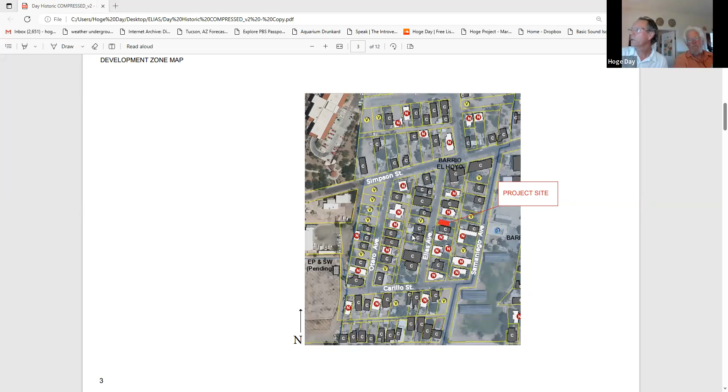Here's the historic inventory form. It's a contributing property, built in 1928. It's unfired adobe, stuccoed, with a couple of courses of fired adobe block on top of the parapet to cap it off. This structure is a bathroom that was added in the 1950s, actually frame and stucco. The house has wood sash windows, actually double hung. This photo makes it look like there's mountains, but there's not, that's just a security screen. Wood doors, stucco finish. I think it's got a flat roof, obviously, and it drains to the east.

Just to make a note of this big mesquite tree, because I'm going to talk about that in a second, behind the house.

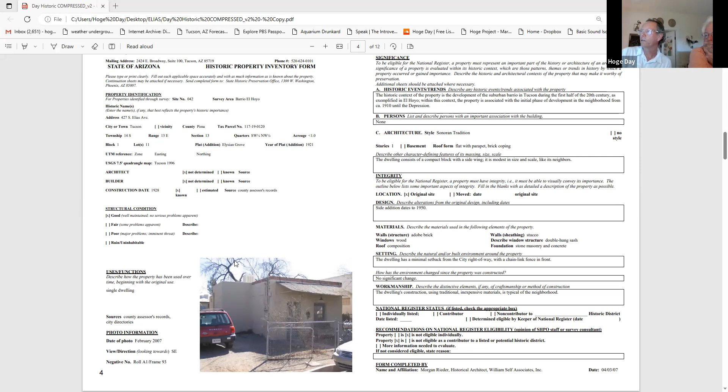So Pat's concept was to add one large feeling room to this otherwise really small house. I'll show you the floor plan in a minute. It's basically broken up into 3 rooms, kind of shotgun style, each of them really small. So his idea is to really move here, and he's thinking about sort of aging in place in this house and moving into something more manageable.

So to make it really livable, he'd love to have one room that's large, with more light and higher ceilings. But his concept for getting it onto this really small lot is to put it here on the north, and preserve this area to the southeast under that mesquite tree as a really nice southern courtyard that he can plant up, use the water off these two roofs, and make that really green and private. The reason I'm talking about this is because it's really crucial for us to shift this far enough north to make it possible. So we're asking for a setback modification on the north side from the typical 6 feet down to 3 feet, and also a height modification, obviously, because those go hand in hand.

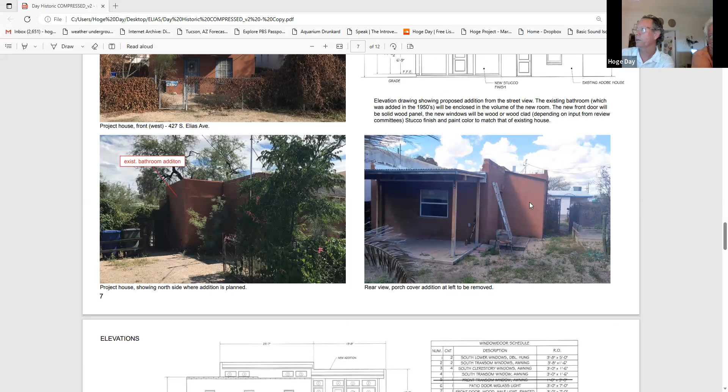This is on the back of the house. Here's that porch cover I talked about. The plan is to get rid of that, to demo that. The new addition would sit here on the north. This small closet would get demoed. It's really kind of tacked on, to create more room for this kind of dining area.

Okay, so here's the west elevation from the street. He's planning on doing a wood post and beam porch on the front with Spanish clay tile. There is some precedence for this in the neighborhood down the block.

Three small windows in the front. What we tried to do was repeat the kind of motif of large rectangular mass with small window and door penetrations in the west face.

In terms of details, this is going to be a frame structure, frame stucco, and the plan is to really try and match the original stucco texture, and of course match the color and the trim color. It has this nice blue kind of periwinkle trim color.

Wood sash windows all around, so that they're paintable. In terms of the stucco detail, we're required to use weep screed at the base for a frame structure like that, but that's the only metal stop that would be involved. All the windows would be inset to create a reveal, and the stucco rolled into the window frames.

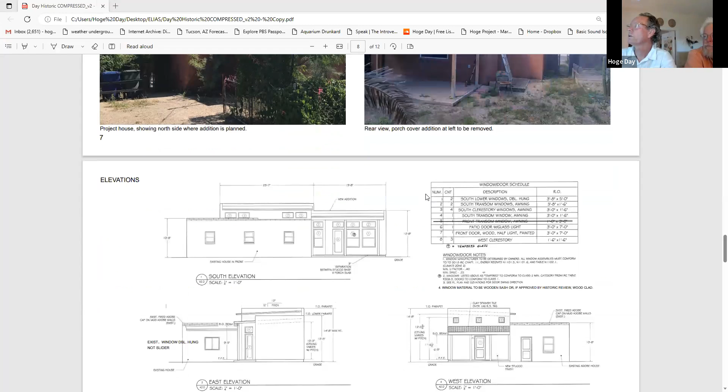Okay, here's the full set of elevations. Here's the south, from the south side. Here's the existing house in front.

This south wall is really where almost all of the fenestration is going. Almost all the windows are going in the south face, really opening strongly to that courtyard on the southeast.

On the east side, we have no windows at all. Here's that courtyard space to the left. On the north side, no windows at all. He really didn't want to have windows that were looking down into Pedro's yard and kind of looming over him.

Also, how the height changes from the ceiling. So we're stepping, the ceilings are 10 foot in this section and 12 foot here. The big reason for that is for us to be able to get these clerestory windows in above, to get light into that main room.

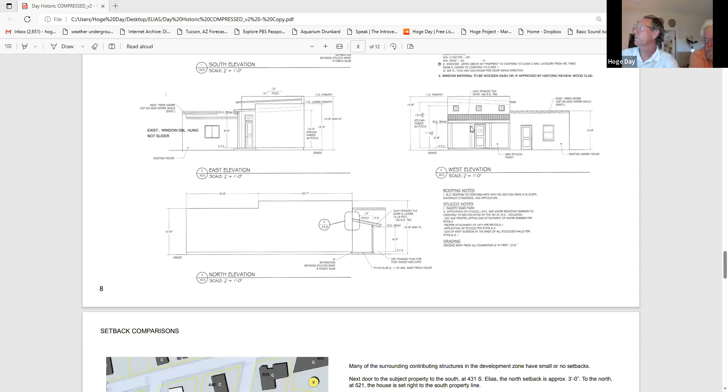Okay, here's that west face again. Do you have any questions on the elevations as I go along? Anybody?

I don't know, maybe if you finish your presentation and then we can comment at the end. Okay, sure.

Okay, so here's a map. I'll zoom in a bit.

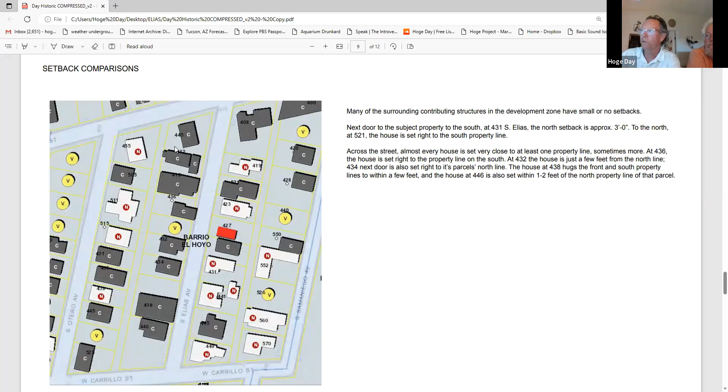Looking at setback comparisons, here's the site marked in red. On the south side of the existing structure, it's only a 3-foot setback now. The house directly to the south also only has a 3-foot setback. As you can see, a lot of the houses have almost zero or very little setback from at least one of the property lines on their lots.

Really, in El Hoyo, it seems like the pattern has a lot of variety. It's not super uniform - some houses have front porches, some have entry gates, some have fences. So we feel like adding a front porch at a slightly higher elevation on the front really fits in with that overall rhythm in the neighborhood.

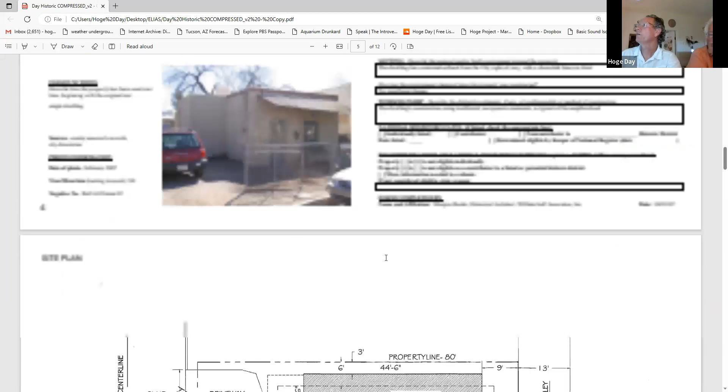Okay, so I'll double back to the criteria. I think a lot of this I already addressed, but I'll go ahead. Let's go ahead and take your questions, and we can go from there. Mary Lou, Grace, do you guys have anything to start with?

I guess the first thing, I don't have any concerns about the setback necessarily. It's more the height and the relationship to the existing structure that are giving me pause.

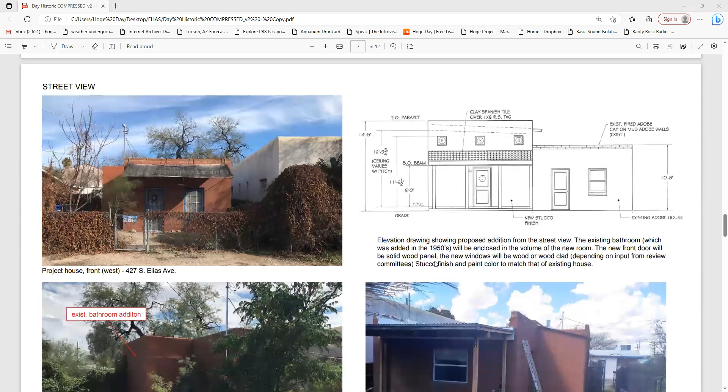So can you go back to the images with the different heights measured? I want to check with Jody because a lot of these are gable roof types, and what we're proposing is a parapet. So when we look at that height, is it measured the same, Jody, to the top of the ridge, or are we talking about halfway down the wall?

Sorry, I have to actually look that up, Grace. I don't have that off the top of my head. Gotcha, yeah, me neither. So let's find out.

That was one thing when I looked at it initially - there are a couple others that are parapet styles that are fairly high. This at 408, it's a parapet roof, right? It's at 18. 412 is also at 18.

Are those contributing structures? I believe they are. Let me just double check. I think so too. When I asked Pat to measure them, I asked him to measure only contributing structures. So yeah, everyone there is.

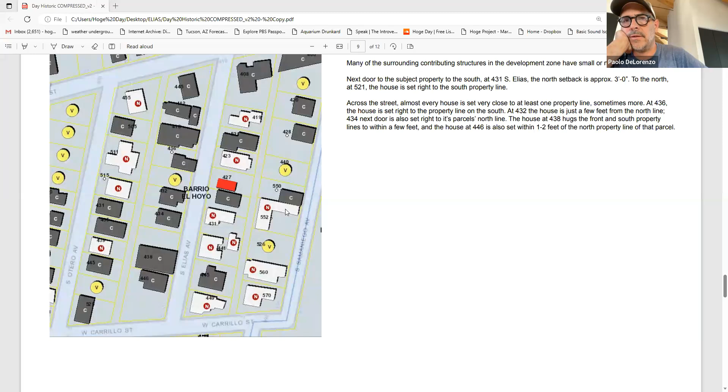Where's 408? Oh, there's 408 on the corner. Yeah. 412 here.

Yeah, it is a bit of a jump up. But as I said, we really love to be able to get those clerestory windows in above the existing. So I'm kind of on the same page with Grace - it seems like the new addition is dominating the historic structure you have in the front.

So I think if we can get clarification through Jody on what an appropriate height is, comparing it to gable roofs. Another one of my concerns is the fenestration - it seems like a lot of this fenestration vernacular is not typical of the Barrio, like these transoms over double hung windows, and the clerestory too. I'm wondering if maybe you can solve some of those lighting issues with skylights up on the roof. You're not going to see those from the street.

Yeah, as you know, skylights are much harder to control in terms of summer versus winter. The idea was to put in windows with a healthy overhang so that you get some solar heat in the winter if you want it, and shade in the summer. Our feeling was that these were not visible from the street, so we took some leeway in terms of inserting somewhat different types.

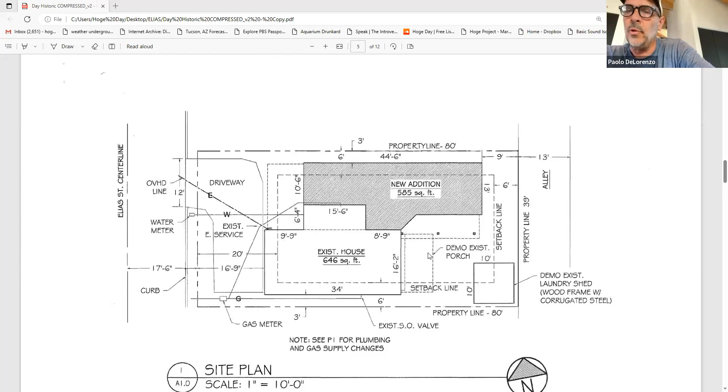Another thing too is when we're doing these new additions onto historic structures, we want to be able to tell the two apart. So I don't know what your intention was when you explained about matching stucco and paint. Obviously I wouldn't want to see a different color paint on there, but we really want to be able to differentiate what the historic structure is and what the new structure is.

The adobe cap, would that be indicated? I mean, there's times mentioning the adobe cap on the parapet, but we wouldn't reproduce that. I know it's a line to walk.

I know that the focus is on proportion, materials, rhythm, those kinds of issues, not trying to fake a kind of old Tucson.

So there are certain moves that we've made, for instance, like the small punch-out windows on the west face. To me, that helps differentiate this as a contemporary building. It does, we're not trying to fake that we're creating the exact same thing.

If you walk into the building, you should know, no, this was an addition, this was done later. It's done with conventional techniques of this period, as the '28 house was done.

But scale-wise and color-wise and some of the materials-wise, it ties in.

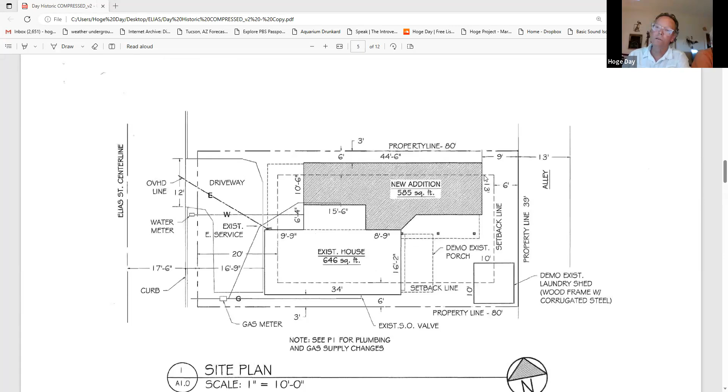So you could put them on the lower level. Correct. Or if we had to, we could put them on the old roof, or even on the ground here on the east side, between the back of the house and the alley. But I do think on that lower roof it'd be pretty well hidden away, certainly from the street, maybe not from the alley.

Is your plan for the new roof draining onto the historic structure? Well, the plan is that it would be guttered to keep the water from draining off of that and down into this courtyard. And the same for this roof, probably do water collection.

So looking at that roof, we'll see the gutter sort of, it looks like two or three feet out in front above the existing roof. I'm looking at that elevation. Yeah, exactly.

Would you be open to wrapping the parapet around the corner so that we don't see the drainage? So then we would wrap it. How far do you think? About twenty-five feet seven inches, I guess. So do you mean to do canales perhaps instead, with a gutter? Is that what you're talking about doing instead of an overhang?

I'm a little nervous about shedding all that water onto the existing historic structure in general, but in an overflow situation, if we could cricket it so it drains off the back. My only problem with that would be then we would remove our overhang from these high windows. Right, but I think that's something we'd be wanting to consider.

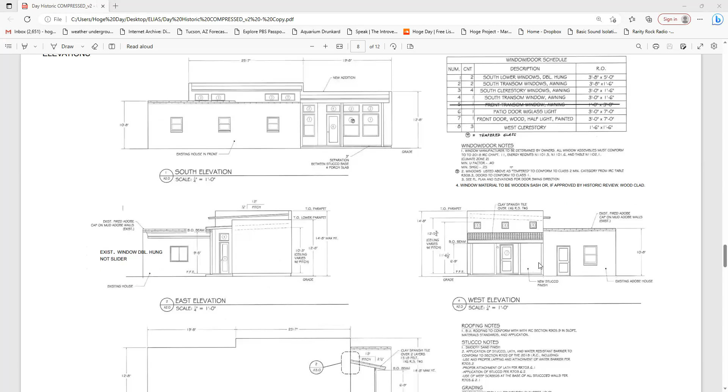Can you gutter the high roof over, not gutter, but send the water from here to here instead of here? Well, that's what she's talking about doing, a parapet here and then cricketing this. But I'm just not sure we have the rise unless we make the parapet even higher, which I don't think anybody wants.

But then you're also going to eliminate your overhang for those windows, right? Right, and we're going to have to do a little bit of give and take.

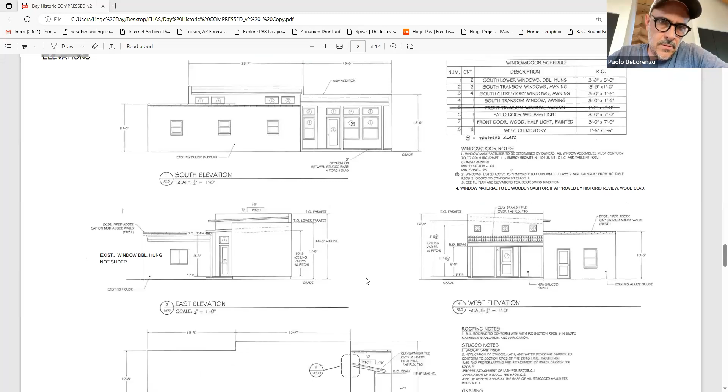Just thinking, because the issue is this sticking out here. Well, what she's concerned about is too much water coming down on this old roof. And it will be, it can be guttered, right? It can be guttered, yeah, but they do back up sometimes and overflow.

This is a little unrelated, but is the finished floor elevation in the addition higher? It is, yeah, because I noticed we're calling this out as 6-9, and the window schedule says 7 for that number 7 door. There is a step up, and I'll show you here at the kitchen. That's because the lot actually rises, and we had to get grade separation.

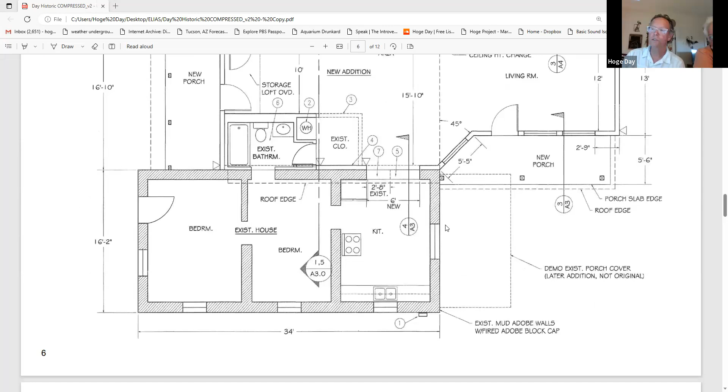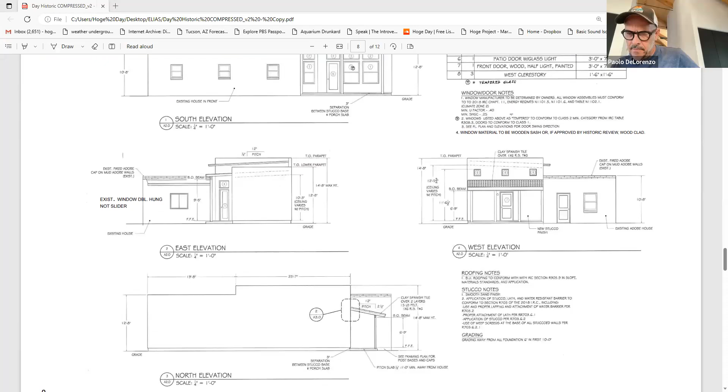What about the tile roof, Mary Lou and Grace? What is your feeling with that? What about the tile roof overhang? You said there's some in the neighborhood in the development zone? Yeah, there's one down the street, and I'll show you that photo here.

Mary Lou, did you have a thought on that? I would just add that he is planning on using real clay tile, not cement tile. Would it be cement set or not? Probably. We've actually laid cement set before, when we were teenagers. But if it seems more in keeping, he wouldn't have to use cement set. It's just what we're used to.

It's a 6-foot porch, it's not big. I'm fine with the clay tile. I almost think maybe not doing cement set. I don't know of any examples in the neighborhood that have that clinking of cement in it.

Mary Lou, did you have a comment on the tile roof? I see where he's getting where the roof is coming from, but it's just, I don't know, it feels somehow out of place. I'm not sure why. Could you bring the picture back up to the proposed? Sorry about that blurriness. I guess maybe for me it's like proportion or a heaviness for that small house. The other one is larger, it's a different time period.

To Mary Lou's point, I think these wood posts, when you see them in the development zone, are usually holding up a much lighter profile roof, with like a standing seam. I think they were corrugated more often. So that may be something she's picking up on too.

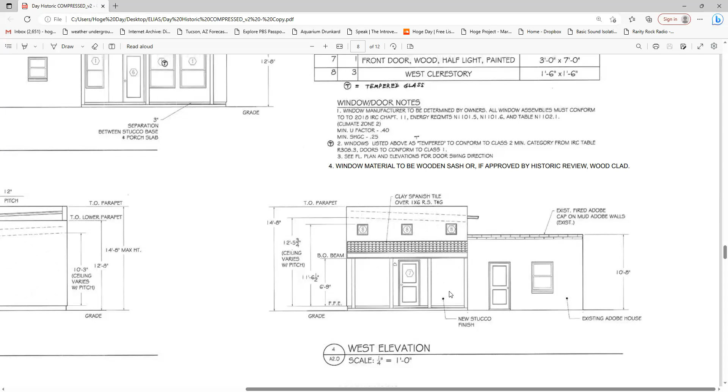Would you all feel more comfortable with corrugated or raised seam? We talked about that as an option, but yeah, I think I would be more comfortable with corrugated. I think Mary Lou's point is that the tile makes it look heavy in comparison to the addition.

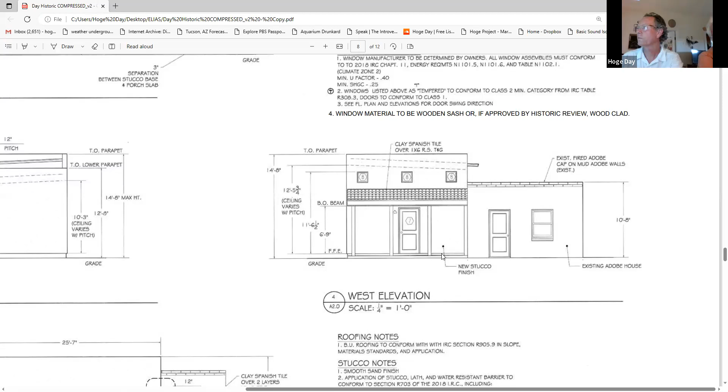What is on the existing one right now on that little area? It's a funny little metal frame with reed fencing on it. It's been there, I've patched it up a hundred times, but it was there when he bought it, and it basically just hangs over the parapet. It's an engineering marvel that it's still there. Is it being held up on the parapet? Well, interesting, it just hooks over it. It floats, it's not attached.

Does the wind ever pick that up? Nope, it's amazing, a marvel of engineering. The lighting, there's this old lighting hardware and it's pretty heavy, so I think that's what keeps it from floating away. Right, conduit ties it down.

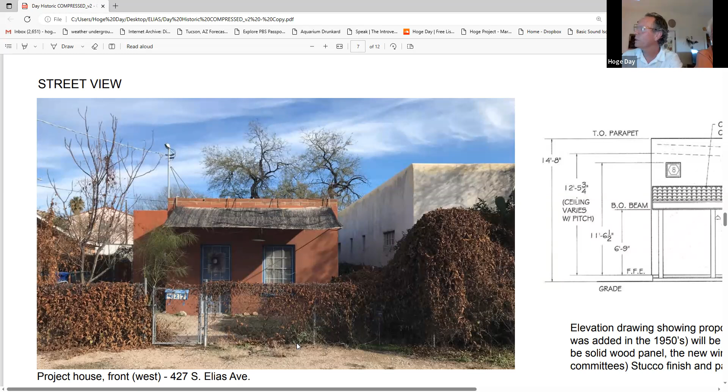Now that we're on that elevation photo, that electrical is going to be moved onto the addition, correct? Yeah, actually I'm trying to remember, because at one point we were going to move the panel to this north edge, but I think the latest keeps it there. I just replaced it all.

Where is that panel in relation to the house? Is it just south of the porch? It's basically south of the porch. Do you mind pointing it out on the floor plan? It sits here, right in front of the porch. The mast comes down right in front of the porch edge. We would have moved it, but like I said, he had trouble with it about a year ago, and they went ahead and upgraded it to 200 amps, so it was done. I think they upgraded it.

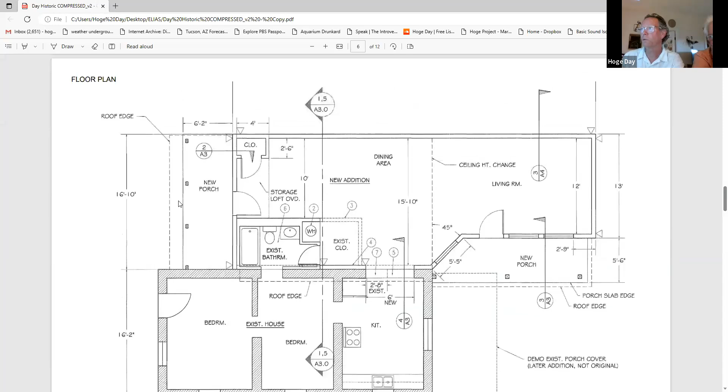Those porch posts, what are those? They look like kind of an odd size. Are they 4 by 6? Yeah, they're 4x6s, and that was to fatten them up from the street to give them a wider profile. I think he'd be fine going with a 6x6 if you all wanted something heavier. No, I think it's probably better to go with the 4 by 6, it doesn't need a 6x6. The 4x4s just looked a little too puny, so we upped them.

And you're planning all wood windows and doors, correct? Yeah, subject to review, we were going to ask you if you were okay with cladding, but as I understand it, you're not, and he's fine doing wood. So it'll all be wood.

The window that's in the existing adobe, what is that? I mentioned these look like muntins, but they're not. It's like a security screen, same vintage as the shade. Somebody just tacked it together. The actual window is a wood double hung.

That's why we stuck with double hungs on the back. I know there's no precedent for transoms in this kind of house, but Pat's house is brick, and has high windows with double hung large windows. He really likes living with those larger windows, so that's what we went with on the back.

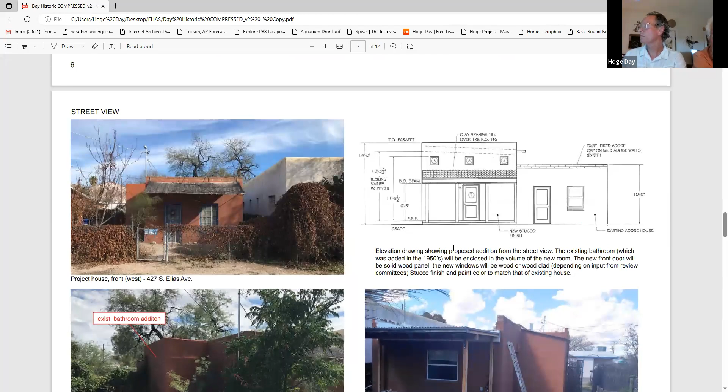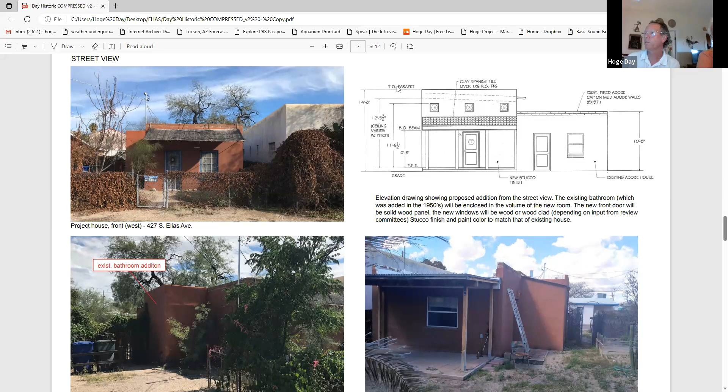The watershed onto the roof, I mean, you'd have to gutter it, do a downspout. Could you slope the high part instead of having it all slope south? Slope it to the east, and that would take it all to... It's a big change. And the problem is you'd run out of room here for these clerestories, because you need all this. So if we pitched it this way, it's really caused a lot of problems.

Sorry, we're just... Yeah, no, you're fine. We're coping.

Okay, I just have a question about procedure. I've only done this once before, about 7 years ago. In the case of revisions, do I go back, do the revisions, and then we do another meeting? That's what usually happens. It depends on your revisions, if they're minor. And if they're major, I assume they have to go back through building as well as you guys. Correct, they have to go back through the city, the building review in the city, and also through you guys.

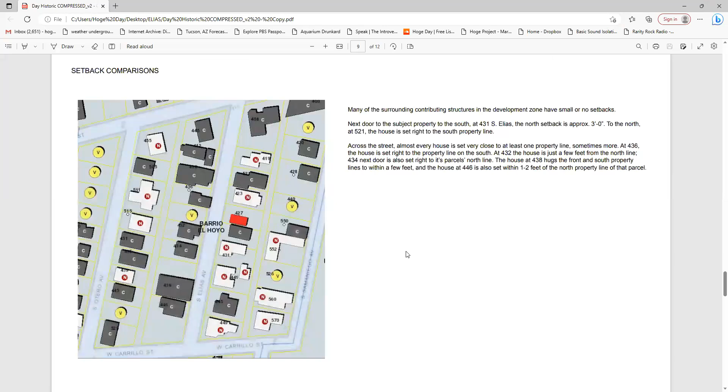Okay, Grace, Mary Lou, do you want to make a motion? Were you thinking to conditionally approve it with those changes? What was your thought? I think I'd like to make a motion to see a resubmittal with some more work done to it. I'll second that. Maybe I can make the motion.

I want to make a motion to continue this review and look at having solid construction exterior walls, maybe trying to solve the clerestory windows through some skylights, especially on the west elevation. And I'd like to see how the south elevation is affected from the street, what you can see and what you can't see. I know we review all four elevations of the plan.

And then maybe reconsider the transom windows above the double hungs in the back. I don't know, it's obviously going to give you extra light, but I don't know if it's worth the cost and architectural expense for that added light. I don't know if the benefit is big enough. And change the roofing material on the porches to corrugated in lieu of the red tile roof.

And I think that's it for my motion now. Also, that 45-degree corner, can you study that a little bit more? We can, it's easy enough to make it a 90. Yeah, I mean, I don't want this, it's what he prefers, but I understand why he prefers that too.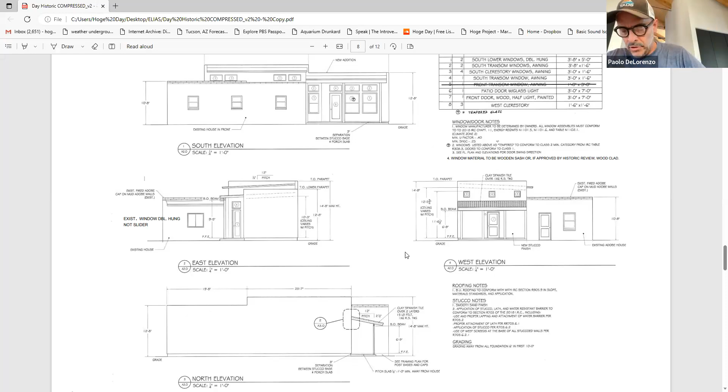Before you have discussion, can we get a second on the motion? I'll second it. Thank you. So maybe study that a little bit more, and if no good solution, we'll reconsider that. And I think we'll be fine with the 3-foot setback, correct?

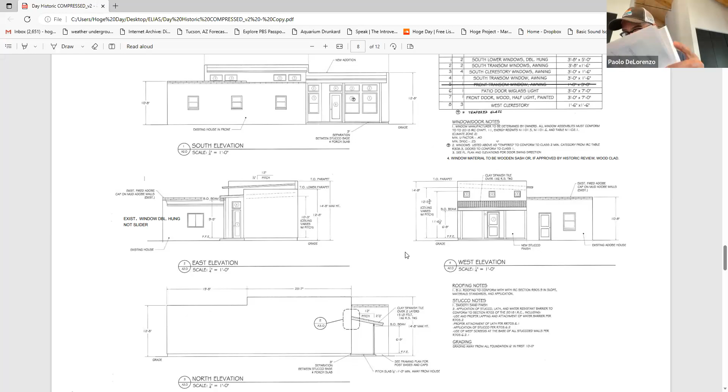Board? Yeah, okay. And on the height issue, it's setback and height. Can we get a clarification? He does have parapets in the development zone that were up to 18 feet. Those are contributing structures, correct, on 408 and 412?

The one next door, yeah. Scroll down, you can see. And 408 kind of has that roof shed structure off the back, which you're proposing. Is that, am I seeing that photo correctly? Right where your cursor's at? Yeah, it looks like there, let me zoom in a little.

I haven't looked at it closely myself. Yeah, and there's a downspout. And that's a leader head and downspout for... yeah. That's the one.

Can I get clarification on the motion? Okay, so you wanted solid construction, not stick on frame, you wanted to continue it to show that. Correct, and wanted to solve the clerestory with skylights, particularly on the west elevation.

And then, I missed, was it the west elevation? The south elevation. Well, primarily the west is the front of the street, correct? He doesn't like those little windows. No, hang on, you're referring to the clerestories on the south elevation?

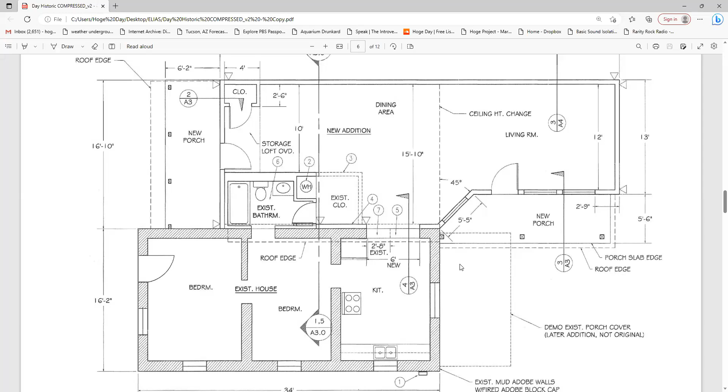All right, does anybody remember what it was between skylights and reconsidering that? We were concerned about the drainage onto the historic structure, or near the historic structure. Right, ah, okay.

If I can just clarify, the south clerestories, we haven't, the reason for the height and the overhang is because of those south clerestories. Right, I think when I was talking about that, maybe if we could see what we would see from the street, from Elias, with reference to those clerestory windows.

Okay, I think that would require a 3D model. I could do a SketchUp model, I think. Yeah, that would help. I don't want to give you more work than you need, but it would be very helpful for us. Yeah, I don't know how else you'd know, right, we wouldn't.

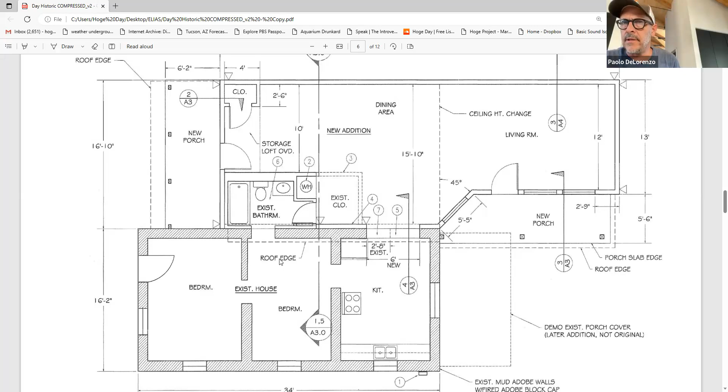I don't know if it helped, but I planted trees. There's gonna be a lot of, some Palo Verdes volunteering in the front yard. I got big mesquites in the back and I want to keep that kind of stuff going. So as far as the street presence, I'm hoping... Can you show us a photo of the front elevation again to reference that landscaping? Sorry, I'm gonna go down.

Here's the front elevation. This vine looks like this in the spring - that's Queen's Wreath - and there are some volunteer Palo Verdes I'm trying to keep going. I'm hoping that whole yard will be... my suspicion is, Paolo, looking at it, you're gonna see some.

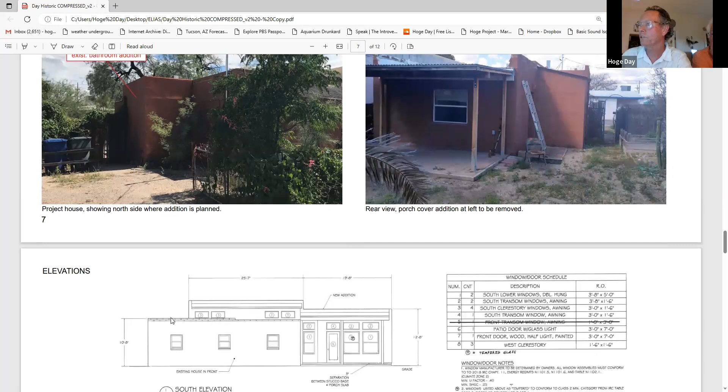That first clerestory, no doubt, right? But it is set back - the front of the house is about 9 feet back from the existing. So here's the existing, right? You can see the addition is set back, which creates the void for that porch. What is that, 9 foot 9 inches?

I believe that's right - 9 foot on your site plan. Yeah, 9'9", yeah.

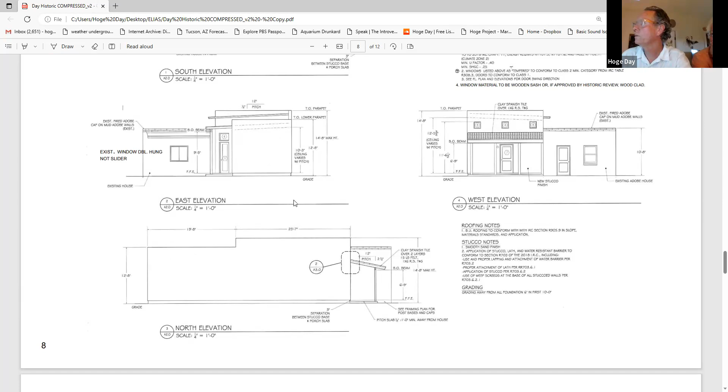So in terms of your concerns, Paolo, would it help if we got rid of one of these clerestories? These shine into the bathroom, which to me is less essential. Maybe you could put a small skylight there instead, or we could eliminate maybe these. I'd love to keep these because they shine into that dining area.

Skylights are very hard - it's sort of a constant, winter, summer, you can't control the heat and light the same way. When they're southern like that, they're picking up the evening light and it's softer, more better. But at any rate, if one or both of those was gone, would that feel better, do you think?

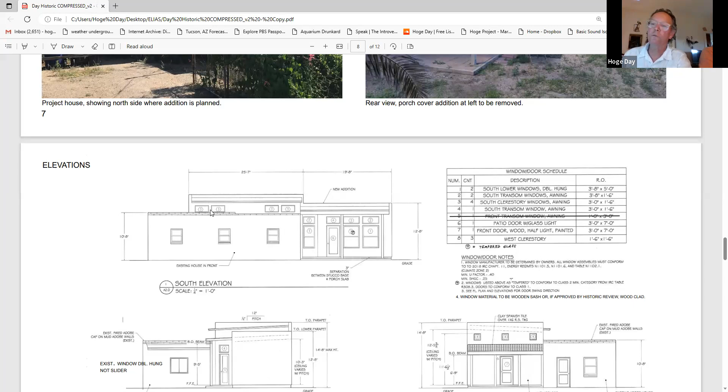It would - it goes again into my hypocrisy of those are not good and those are good, but I think it would be better. Okay, so that's something easy to consider, or maybe one for the back instead.

Okay. So Jody, are we clear on the motion now? Sure, I'm pretty sure I got it, kind of mostly. You want to go back and listen again, and then we'll vote on it?

Do you want me to continue this, and I'll finesse it, but basically: you want solid CMU masonry construction, you want to solve the clerestories with skylights on the elevation, you want to address drainage on or near the historic structure, reconsider transoms above the double hung in the rear, change roofing to corrugated metal in lieu of red tile, and study the 45-degree corner at the southeast corner.

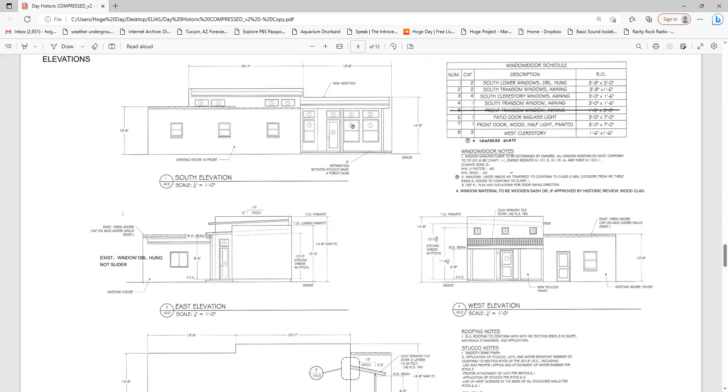So I think height-wise, the precedents are working just fine. So they're measuring to the top of the gable for parapet roofs too - is that what it is? Yes. Okay, so that's our motion.

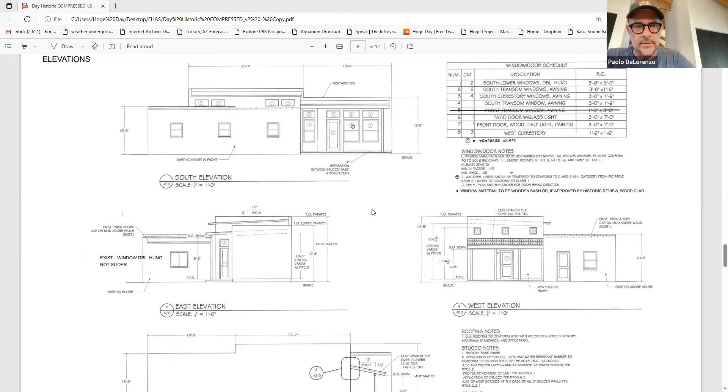Mary Lou has seconded it. Let's take a vote. Grace, aye. Mary Lou, aye, and Paolo, aye. So Patrick and Hoge, thank you for your time, and we'll see you hopefully sooner rather than later. Thank you, take care.

So I included the guidelines on the agenda, should you want to continue the discussion, but it's your prerogative. I would rather postpone if possible. Could we postpone and do nothing but guidelines? Yeah, I'm giving options, I'm happy to put it. No, we appreciate that, Jody.

Yes, we do. Did you want to set up a special meeting? Yes. Okay, yeah, I mean, we probably only have one more to go, don't we? Yeah, we do, just one more. I'm available any Monday the rest of the month, and the first one in June, and then I'll be out of town for 2 weeks in June.

So you guys take your pick. Just so you know, I'm already booked the 22nd, and the 29th is a holiday. Oh, Labor Day? Or is that Memorial Day? One of those, I don't know why I can't ever get those right, I mix those up.